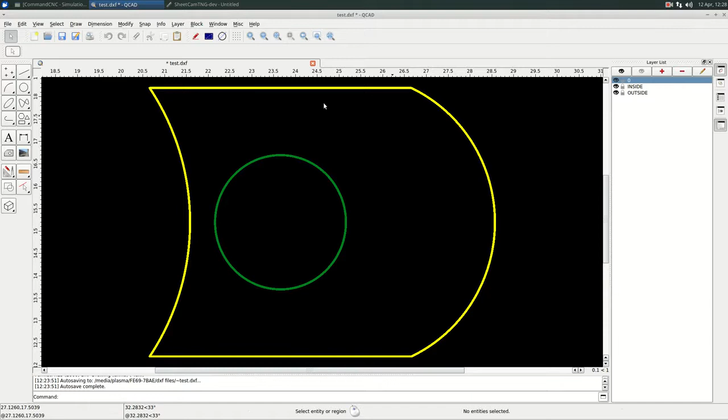the control program. So once we have our drawing, I'm using QCAD here, and I have my inside offset and my outside offset. We save it, give it a name, save. Do I want to overwrite it? Yes. Alright, next step would be have SheetCam, open SheetCam. I usually open all three programs and have them running all at the same time.

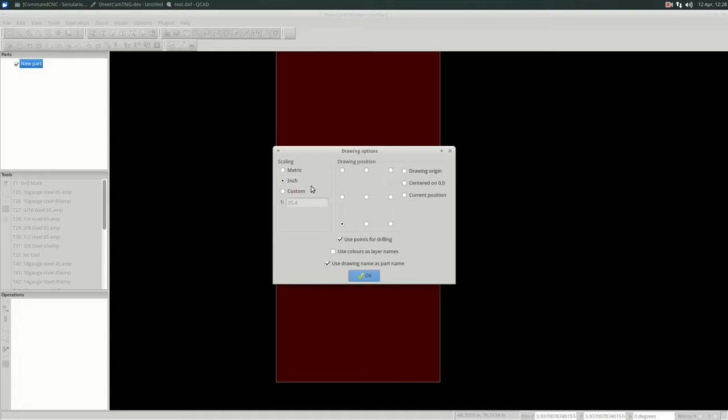First thing we're going to do is import our drawing. There's our test drawing we did. It's going to ask us how we drew it. I drew it in inches and I want to pull it in the bottom left. So there it is. I'm cutting this out of 10 gauge. So I'm going to click create a new jet cutting operation.

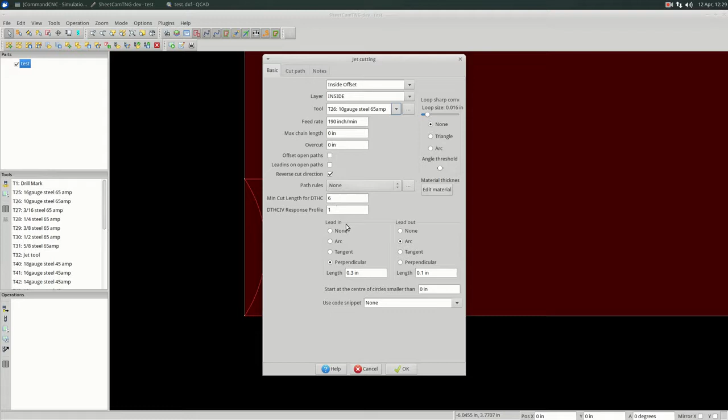I'm going to do the inside offset first on the inside layer. I'm going to do this out of 10 gauge. And my minimum cut length at 6 inches like I usually do. My lead in, I'm going to do a perpendicular lead in and an arc lead out. There's my path. Now I'm going to do the same thing for the next cut.

An outside operation on the layer outside, same material. I'm going to use the same lead in and lead out, choose OK. You see that it's going to start up here. I'd like to change that, so I'm going to edit my starting points. I'm going to move it here.

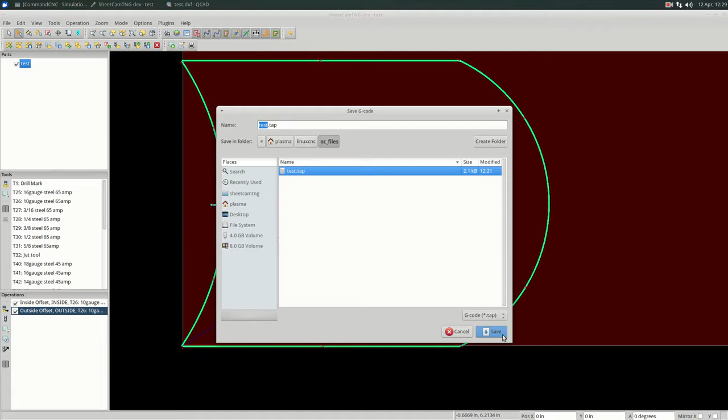Alright, once I'm happy with how everything is going to work, I can click this button here to run the post processor, give it a name. I'm going to overwrite this one. It'll ask me. Replace, yes. You can turn this dialog box off. It will only come up if there's errors, which I typically set it to that.

Okay, so we open the CommandCNC program. Now, if you've already had CommandCNC going and your machine has been on and you've already referenced it, you do not have to reference it again. If this is our first time starting up, then we would need to home our axis.

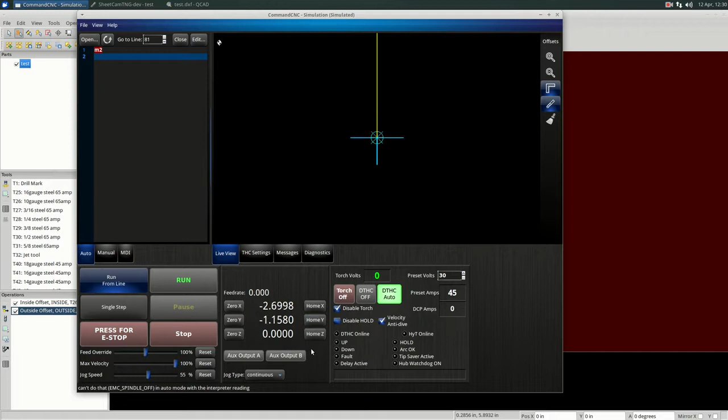Alright, then we're going to locate our 0, 0 point for the piece we're cutting. So we put it on the corner of our steel. 0 everything. Alright, I'm going to open my program. We're going to see that it's there. I can turn the rulers off. I like to leave them on so I know how far it's going to move. I can quickly see in case I have a stray line out here.

Next thing we do is make sure the plasma cutter is on. We have the right consumables installed for what our program is. As you remember, this was 10 gauge, 65 amps, so I need to have 65 amp consumables installed. And we click run. You can see that this is simulating, we're not actually cutting at the moment. And that is it.